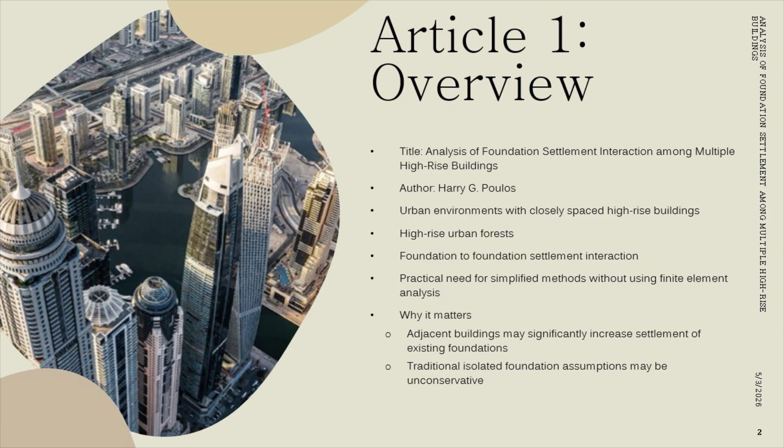From an engineering perspective, the buildings considered in this study are supported on deep foundations, typically pile groups. Rather than modeling each pile individually, Poulos uses an equivalent pier approach. In this method, the entire pile group, pile cap, and enclosed soil mass are represented as a single pier with equivalent stiffness.

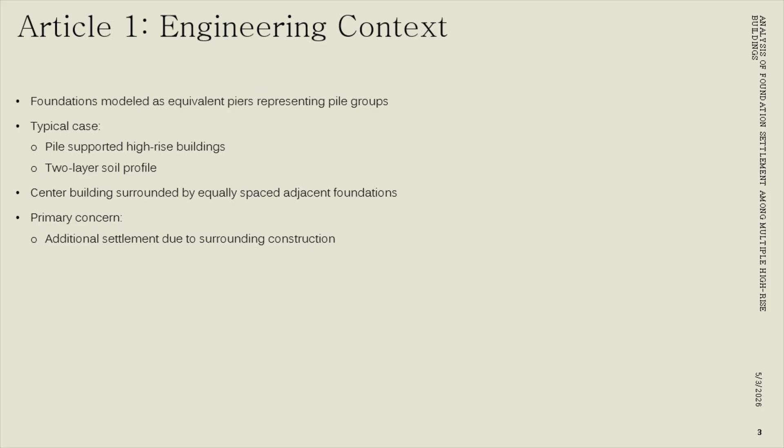The subsurface profile is idealized as a layered soil system, commonly consisting of a softer upper layer over a stiffer bearing stratum. This is representative of many urban sites supporting high-rise construction. The primary engineering problem addressed is how settlement of a building evolves as surrounding buildings are constructed and loaded, particularly when the construction occurs in stages rather than simultaneously.

To study these interaction effects, Poulos performs axisymmetric finite element analysis using Plaxis. The foundation of interest is modeled as a central equivalent pier, while surrounding buildings are represented as concentric smeared pier rings. This approach allows multiple nearby foundations to be simulated within a simplified axisymmetric framework.

Typical parameters used in the analyses include equivalent pier diameters of approximately 50 meters, pier lengths ranging from 20 to 40 meters, and applied pressures of about 300 kilopascals, which are representative of multi-story building loads. Based on these numerical results, Poulos develops settlement interaction factors that quantify the additional settlement induced at one foundation due to loading of adjacent foundations, as a function of spacing and relative stiffness.

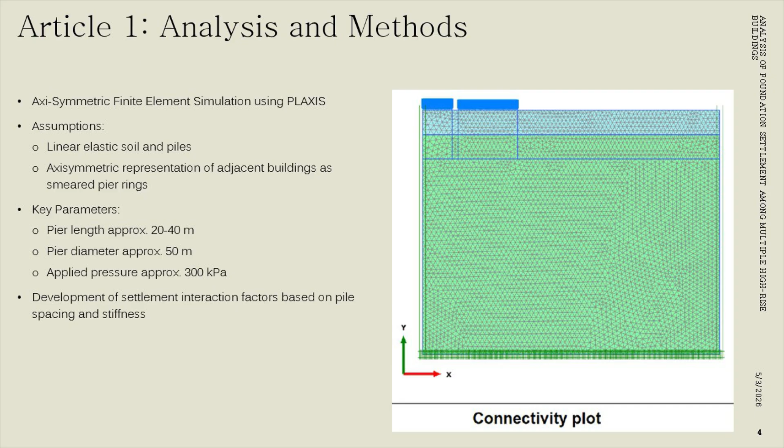One of the most important findings of this study is the magnitude of settlement interaction effects. In several cases, the settlement of the central foundation increased dramatically after surrounding foundations were loaded. For example, settlement increased from approximately 75 millimeters under the building's own load to over 200 millimeters once nearby buildings were constructed.

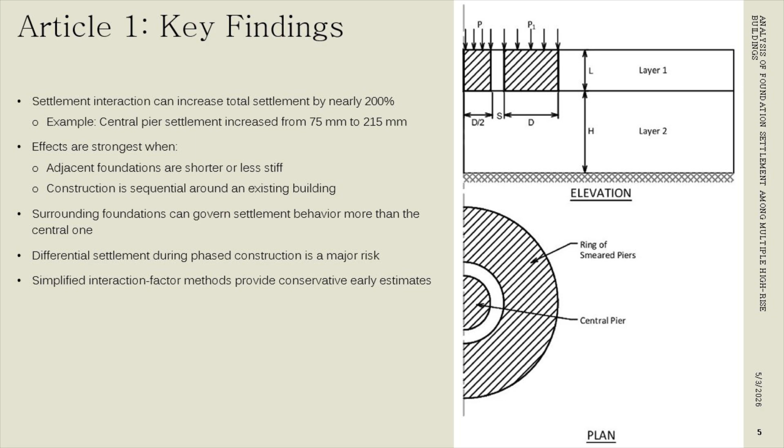The study also shows that interaction effects are especially pronounced when surrounding foundations are shorter or less stiff than the central foundation. In these cases, the stiffness contrast causes greater load redistribution through the soil. A key practical takeaway is that the stiffness of adjacent foundations can control settlement behavior more than the properties of the building being evaluated. This has major implications for staged urban construction.

The second article is titled Performance of a Deep Excavation and the Influence on Adjacent Piles by Yang and co-authors. This paper represents a detailed case history of a deep excavation for a metro station in Guangzhou, China, constructed near an existing bridge. The project site is located in a karst region with highly variable subsurface conditions, including soft clay, sand layers, karst cavities, and confined groundwater.

This case study is particularly important because it combines extensive field monitoring with numerical back analysis to clearly identify the mechanisms responsible for unexpected settlement of nearby bridge piles.

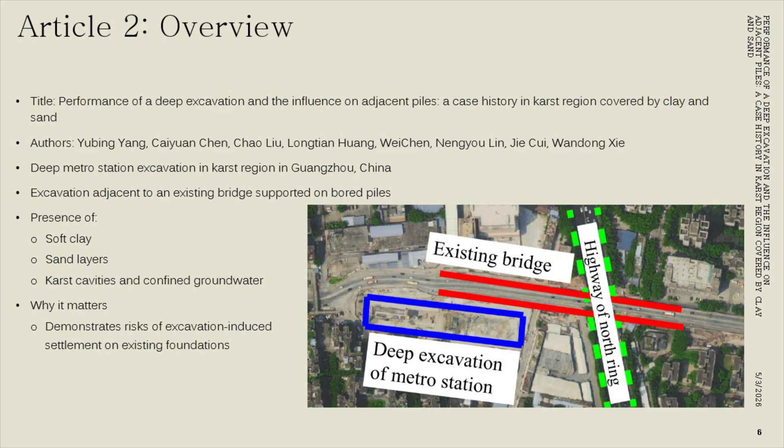The metro station excavation had a depth of approximately 18 meters and was supported by 1 meter thick diaphragm walls. The retaining system included multiple levels of internal bracing using reinforced concrete struts at upper levels and steel struts at deeper levels. An existing bridge supported on cast-in-place bored piles was located approximately 18 meters from the excavation. Some of these piles were founded in soft clay rather than bearing on rock.

The main engineering concern here was whether excavation-induced soil movement and groundwater changes would cause excessive settlement or damage to the existing bridge foundation system.

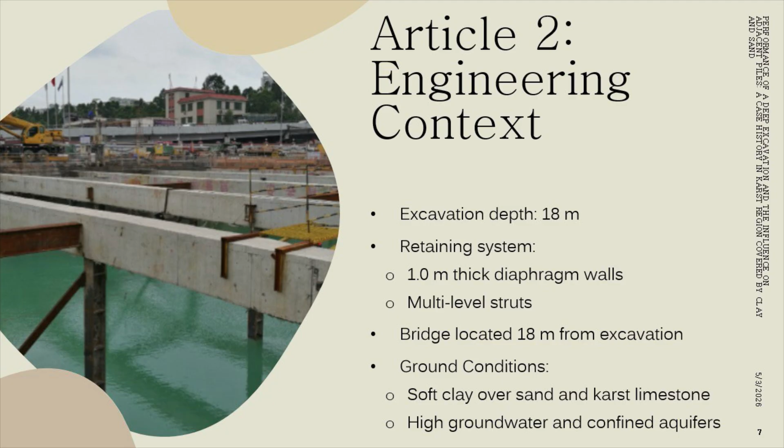This project relied heavily on field observations to track system performance. Monitoring included inclinometer measurements of wall and soil movement, ground surface settlement points, groundwater monitoring wells, and precise level measurements on bridge piles. During excavation, significant groundwater inflow occurred, leading to the use of the Metro Jet System grouting method to control water ingress. This intervention itself caused additional soil disturbance.

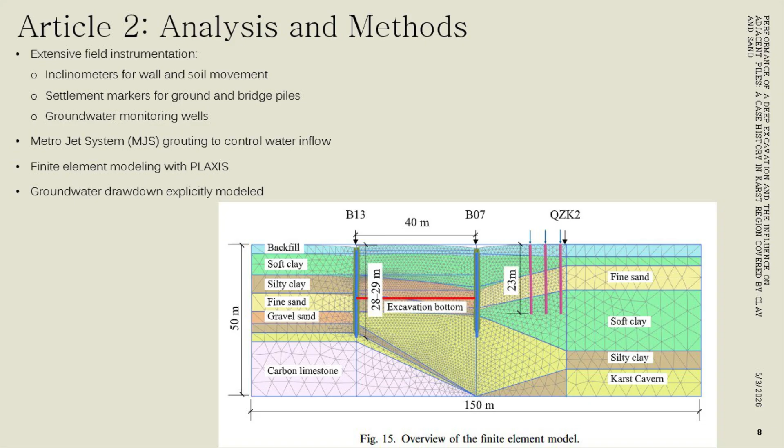To supplement field data, numerical analyses were performed using Plaxis 2D with the hardening soils small strain model, allowing the authors to capture both stress-dependent stiffness and small strain behavior. Field measurements showed that maximum diaphragm wall deflections ranged from 0.13 to 0.30% of the excavation depth, with an average of about 0.2%. These values were consistent with empirical prediction methods.

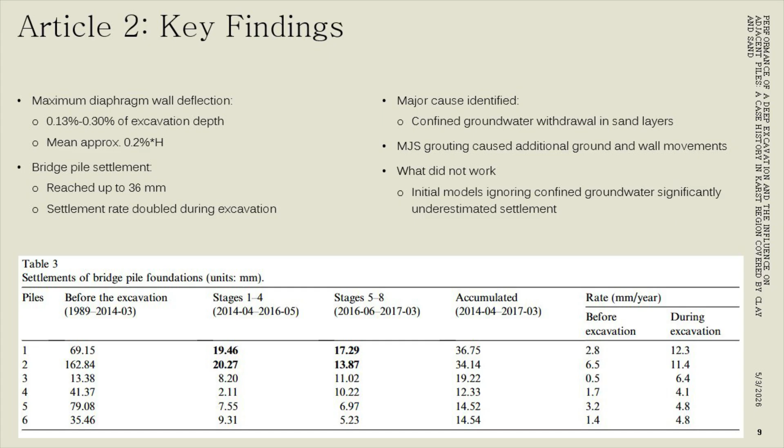However, the most significant finding involved the nearby bridge piles. Settlements reached values of up to approximately 36 millimeters, and settlement rates more than doubled during excavation. Initial numerical models that neglected confined groundwater significantly underestimated both ground surface and pile settlements. When confined water drawdown in the sand layers was included, model predictions closely matched observed behavior, demonstrating that groundwater withdrawal was the dominant settlement mechanism.

Although these case studies address different problems, they share several common themes. The Poulos paper focuses on interaction between adjacent foundations, while the Yang paper focuses on interaction between excavation, soil, groundwater, and existing foundations. Both studies show that construction sequencing is critical and that interaction effects evolve over time rather than occurring instantly. In addition, both papers demonstrate that simplified assumptions, such as isolated foundations or ignoring groundwater effects, can lead to unconservative designs.

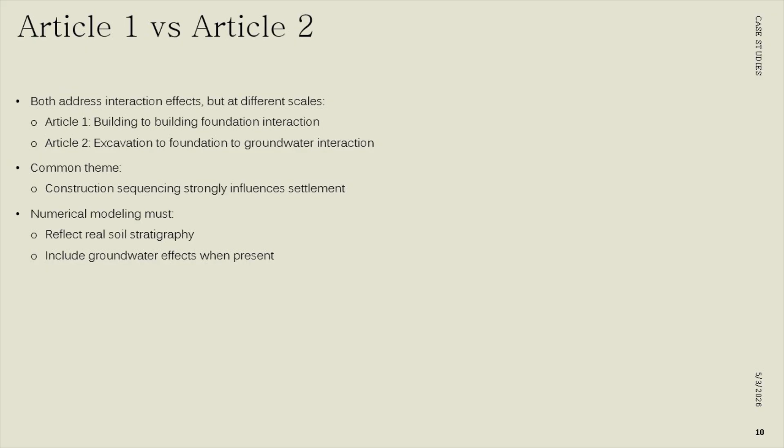These case studies highlight several important lessons that are directly applicable to engineering practice, particularly in dense urban environments. One key lesson is that foundations should not be analyzed as isolated systems when nearby construction is anticipated. Both papers show that adjacent buildings or excavations can significantly alter the stress distribution in the soil, leading to settlements that are much larger than those predicted using traditional isolated foundation assumptions.

Another important takeaway is the role of groundwater behavior. The deep excavation case clearly demonstrates that confined aquifers can dominate settlement mechanisms, sometimes to a greater extent than soil stiffness or retaining wall performance. If groundwater drawdown is not properly accounted for, even advanced numerical models can substantially underestimate ground and foundation movements.

These studies also reinforce the value of field monitoring. Instrumentation played a critical role in identifying unexpected behavior, confirming governing mechanisms, and guiding back analysis. Monitoring is essential not only for construction safety, but also for improving the reliability of analytical models in future designs.

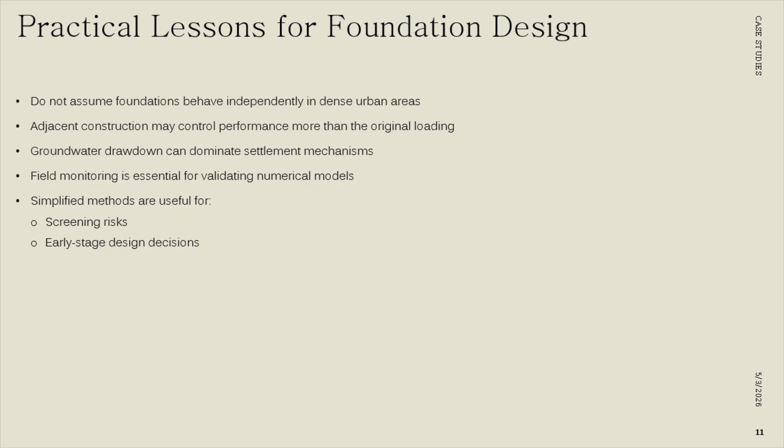Both papers emphasize that simplified analytical approaches can still be extremely useful. When applied conservatively, simplified methods such as interaction factors or screening level analyses provide engineers with practical tools for early decision-making and risk assessment before resorting to more complex models.

What I found most interesting in these studies was how significant interaction effects can be compared to what is commonly assumed during routine design. In the Poulos paper, the fact that settlement of a building nearly tripled due solely to the construction of surrounding buildings was particularly striking. The central foundation itself did not change, yet its performance deteriorated dramatically as nearby foundations were added. This highlights how misleading it can be to evaluate foundations in isolation when development occurs in phases.

This study also connects directly to how an individual pile behaves differently from a pile group. In practice, individual piles are often designed assuming uniform stress distribution and limited interaction with adjacent elements. However, once piles act as part of a group or are influenced by nearby groups, their behavior is governed much more by group stiffness, load sharing, and interaction through the soil.

Poulos' equivalent pier approach effectively captures this concept by treating the pile group as a single system rather than a collection of independent piles. The paper reinforces that pile capacity and settlement behavior cannot simply be scaled up from single pile behavior without considering group effects and external interactions.

In the deep excavation case study, what stood out most was that groundwater drawdown had a greater impact on bridge pile settlement than soil deformation caused by excavation alone. This reinforces how dominant groundwater conditions can be, especially in layered soil profiles with confined aquifers. It also illustrates how pile foundations that may appear adequate under static conditions can experience accelerated settlement when hydraulic changes occur nearby.

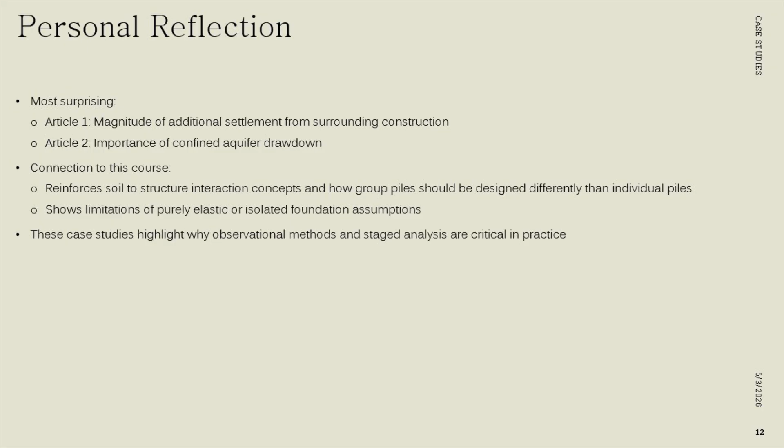This semester has taught me a great deal about the design and performance of both deep and shallow foundations.